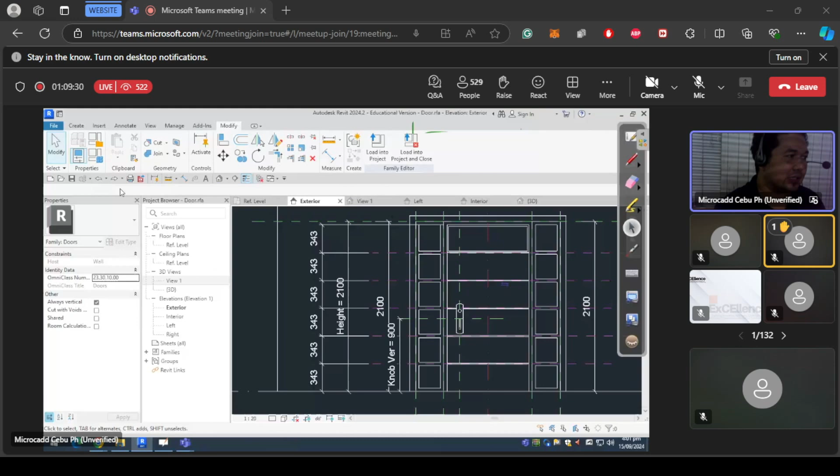Okay, so in Revit, if you are starting, you should use what's called a template so that you have a predefined setup. So for the model, I will just use new, and for this example, I will start to demo the architectural.

Let me look for the project template for this one. I'll use the default US Canada for the project template. So this is an architectural default US Canada standard.

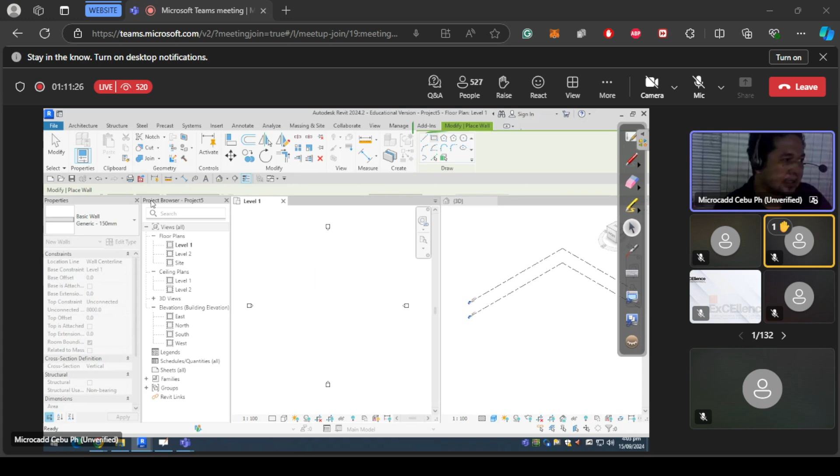So we'll check here what the height is. What if I want the height up to level 2? As default it's 4,000, but you can change the height, so I'll set it to level 2, and then after that, I'll draw it.

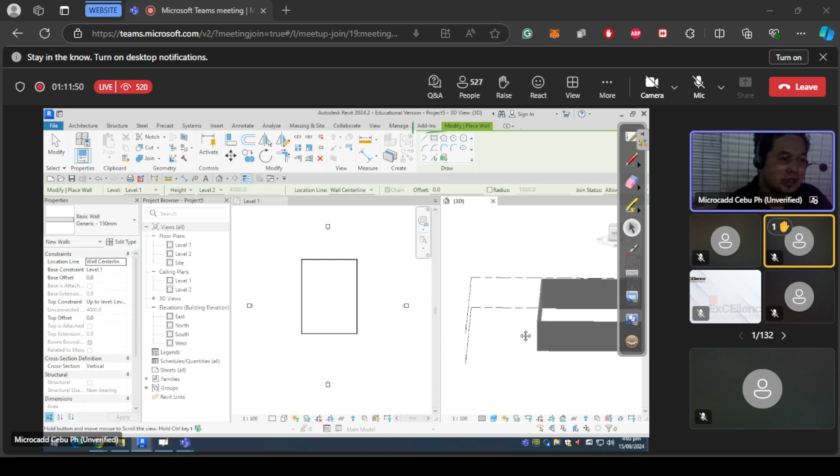So what have you noticed happened now? We have now a 3D model, and that 3D model is automatically at the top, at level 2.

And if you want to revise, for example, because in a project, revisions are the most common thing, so if there's a revision and you want to revise, you just update it. It's not like in CAD or AutoCAD, where you work in 2D first and then convert it into 3D.

And another feature of Revit is it has predefined libraries you can use. You can also create a customized library, or you can also use the Autodesk one. So for example, I'll use a predefined one here, which is doors.

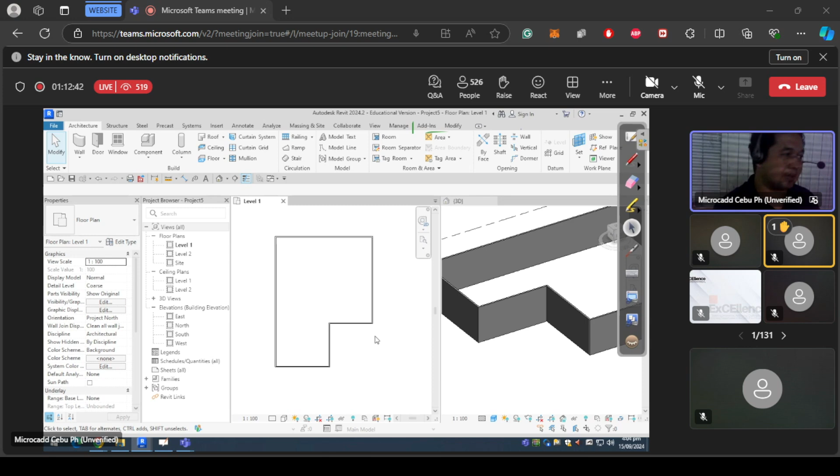So I'll place a door, then let me look for the door to use. For example, I will try to use the residential one. This one, it has types here, and here are the standard sizes, example 900 by 2.1, or 2,100.

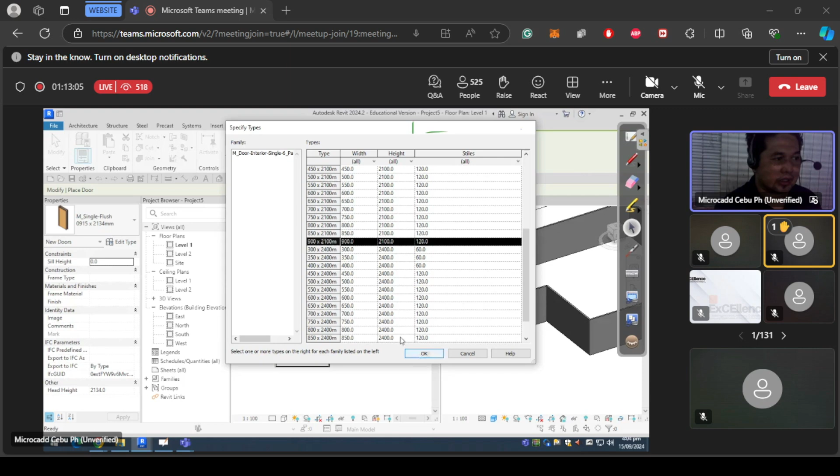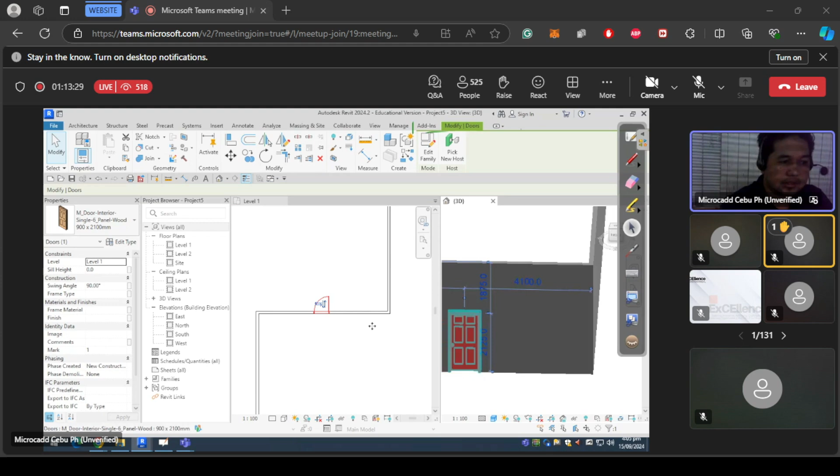So once you change it, it affects the 3D and plan, even in scheduling. If you have a schedule and you erase this, your count will be reduced. If it becomes 0, automatically the schedule for doors gets erased or deleted for whatever was removed.

Anyway, I will just drag this one. If possible, if you want a certain distance for that, let's say I will add 100. I'll snap it here at 100.

So now it's 100, and then I will just erase it. So you can control the distance. Okay, next I will use a window here.

Same thing, I will load a library, for Autodesk. So W for windows. It's called family here, I will try to open the family, and these are our families.

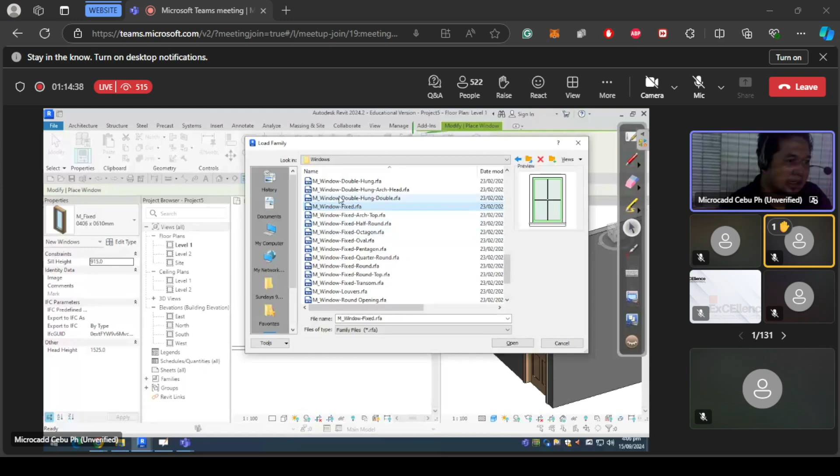Okay, so I will just use this one, then attach it here. And so there it is. Then what if I want to center this location of the window here on the wall?

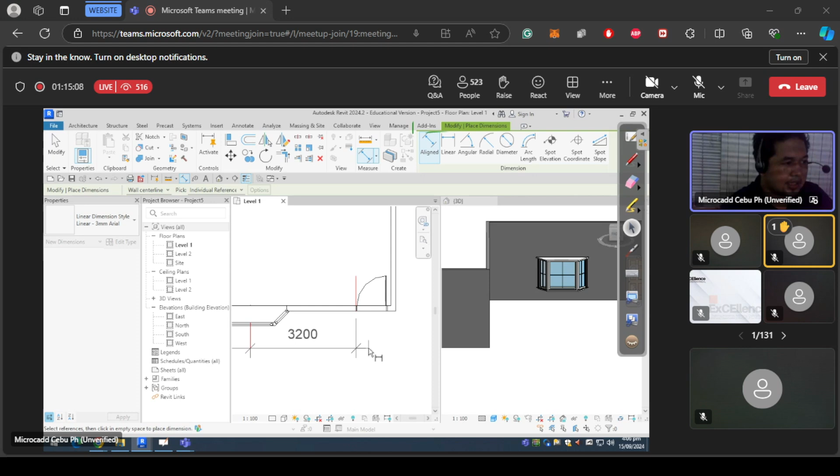I can just add, and remove it from our window, a door and equal, so automatically it now has a center at the midpoint. And then this is the biggest challenge, especially in manual drafting.

I don't know if there's still manual drafting nowadays.

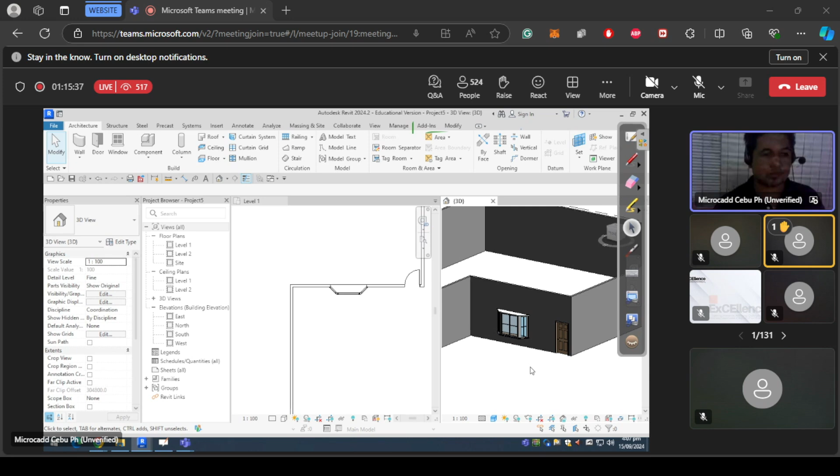But before that, we had that subject for manual drafting. So the biggest challenge even in AutoCAD is, kahit sa AutoCAD, how to create a roof. So for the roof, let's make it easy. Example, I will try to change the level.

Kasi masyadong mataas, okay? I'll say typical height 3,000 and automatically you will have a height of 3,000. So that's how easy the revision is.

And then what if I decided to create a roof? So there's already a tool here that can create roof. Let's check it here. Okay, roof, then I will have the overhang. Okay, then this one, 1,000, so I will just use 1,000.

So Revit has the capability to compute our slopes, the design of your roofing. So for example, for now, I will just use the 30 degrees slope and finish it.

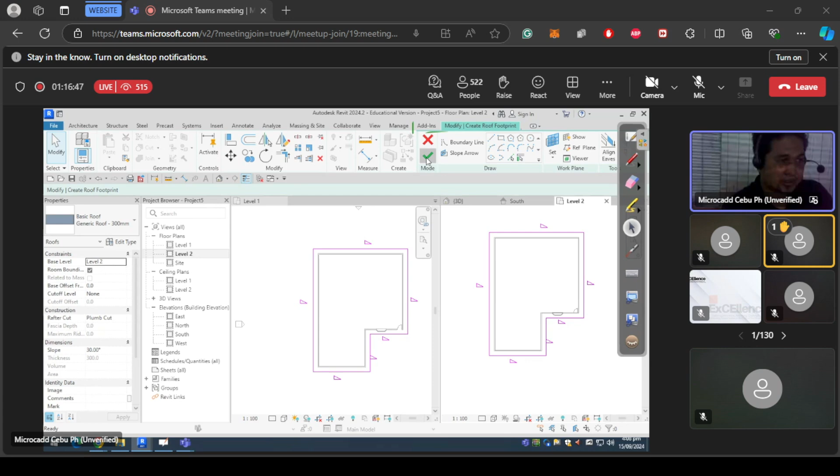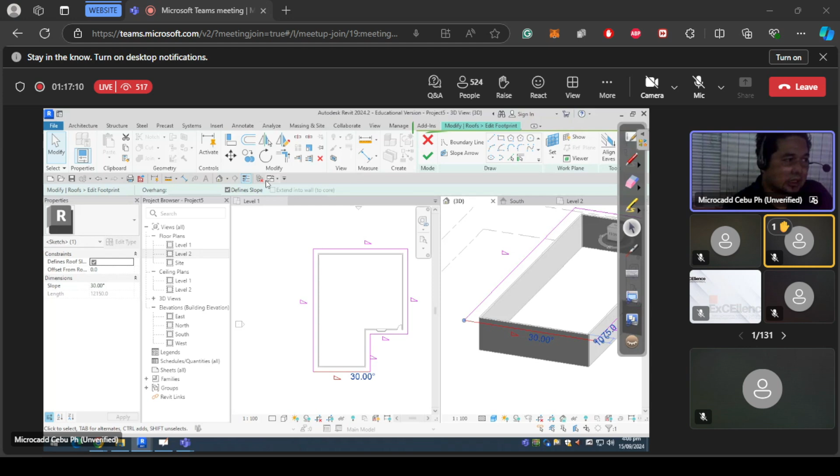So it's finished, and if I try to click into 3D view, we now have the roof for that. So this one is called hip roof. If you want to convert this into gable, you can just change the property. Then I'll just close it, attach it.

That's how easy it is. So you can also try this one. I know some of you already have an idea about creating plans, but in Revit, it's parametric.

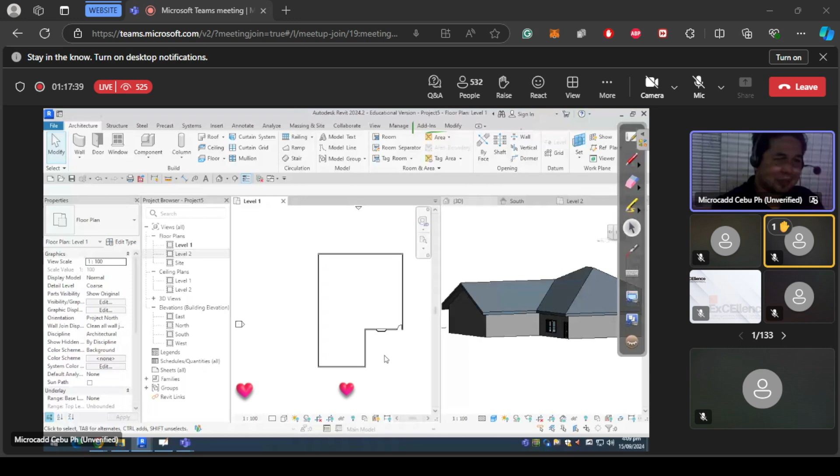So for another one, as our program for civil, what about the project cost? For example, I want to check the area of the wall. So actually I can get that by creating schedule quantities. It's possible here.

So I'll analyze it rather than checking it manually by means of height, then the area, then subtract the opening. Here, automatically you have that area.

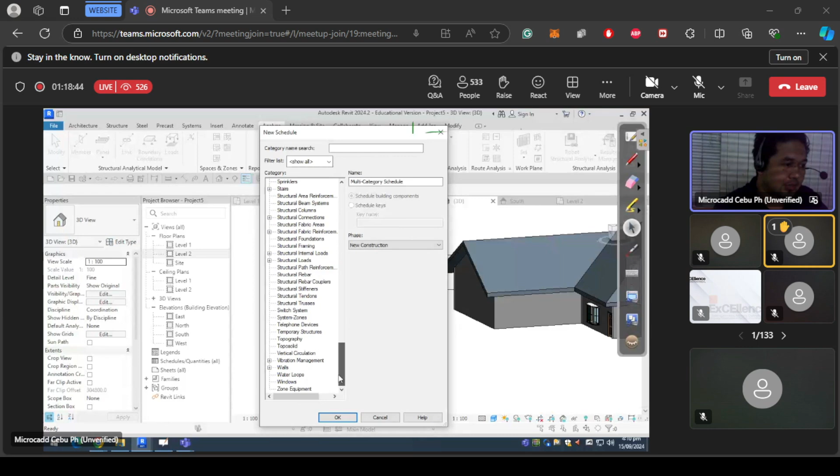Okay, so I will just use this one tool, schedule quantities, and identify. The main idea here is just to identify what is the category, and the category for the wall is just wall. They're the same. And I'll say, okay, identify this.

I already have the area, and the thickness I used. I can have the type name, type, and when I click okay, there, I get the area.

But I can also modify that, so let's sort it into one. Sort by type, since it's just one type. Then let's get the totals. Okay, there. Oops, what happened here? Sorting.

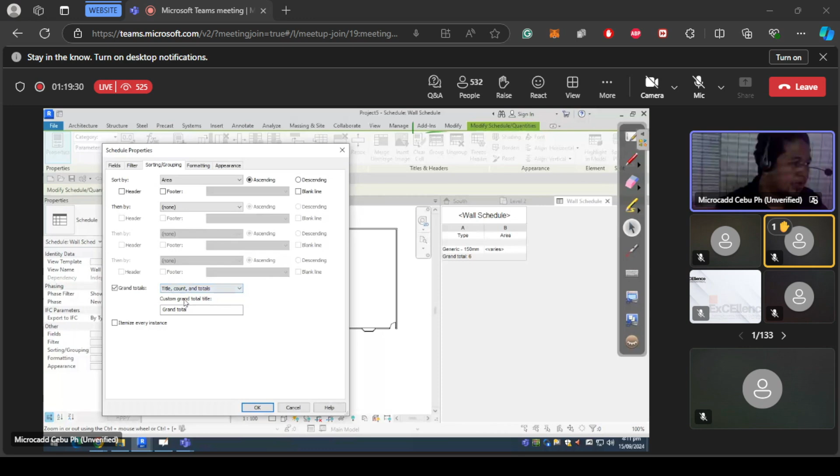Okay, so by area. It's not possible by area alone, but you can get the totals. It's possible to get the total. Then, formatting, then you can add totals so we can get it. There, so this is the area for that wall.

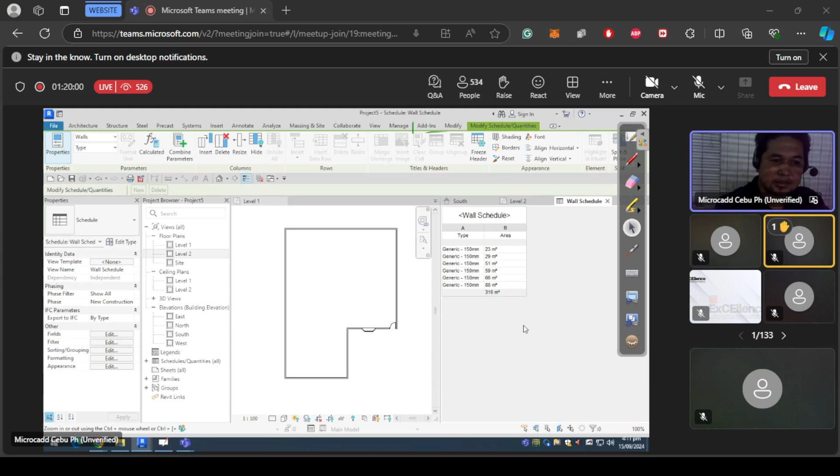The good thing here is, if there's a revision, like for example, I change this, okay, this one, the area will automatically be reduced. It's automatic, so we've defined the area of the wall.

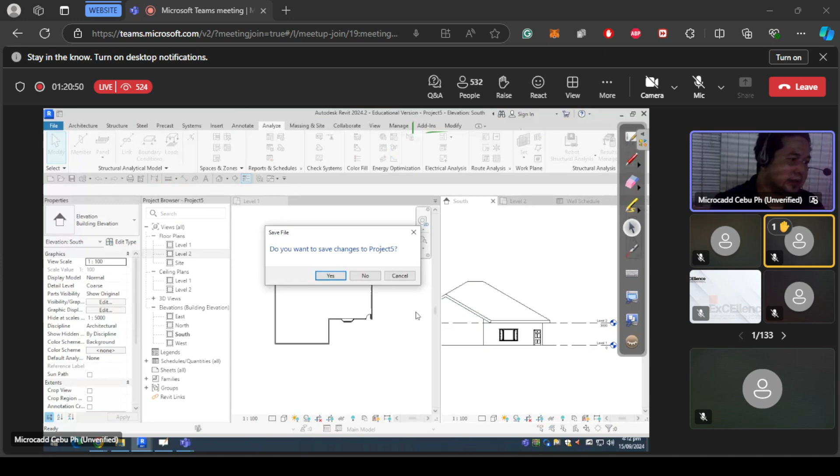Okay, so I will try to close this, then create a new one. Again, just a reminder, in structural, we cannot design structural without architectural first.

So that's necessary, it's a prerequisite of structural and MEP. So for now, I'll just assume, class. Okay, so I will just use this one, Structural Analysis Default Metric, and open it. Okay, so I'll make a grid here.

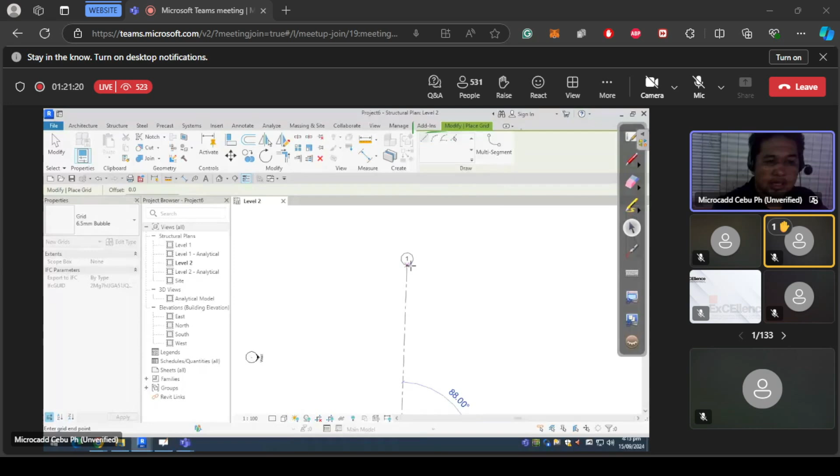So let me make a grid here. There it is. The good thing here, for example, you have the grid, you have this grid bubble, and it already has the column index indicated. So number 1, and if you notice, I will try to have 5,000.

Automatically, the next is number 2, then you have number 3. Okay, there, it's automatic.

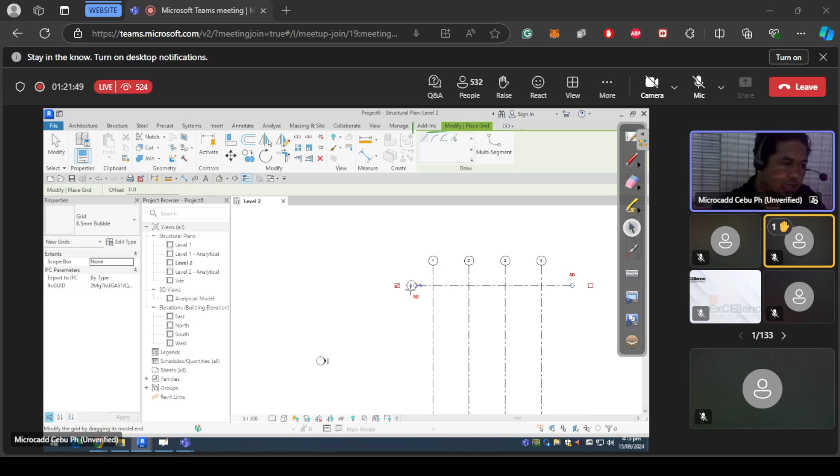I will just create a line first. And change it into A. So I'll say A, so once it's detected, it becomes A already.

So if I will continue the creation for the grid, for example 5,000 again, automatically it updates, you get this BC, it's already updated and continuous.

You can just adjust from there. So if you encounter, for example, multiple segments, that happens when the property line is too irregular. Okay, so you have this one, we have multiple segments for that.

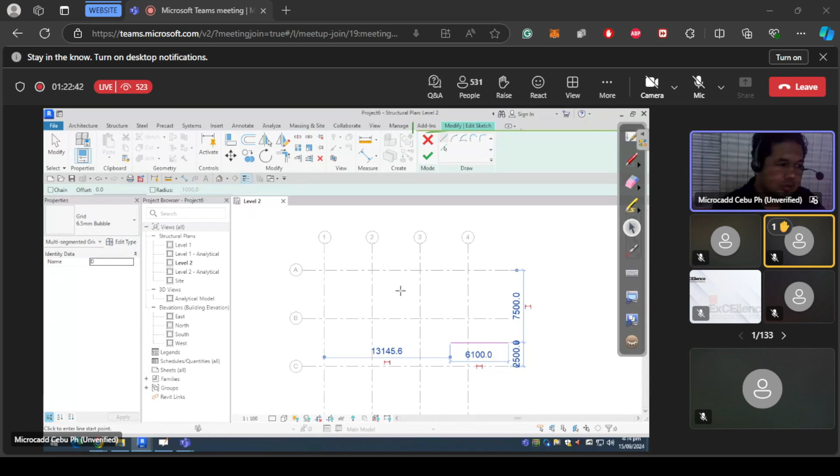So what I'll do is start here, this is just an example, then go over there. I'll just check the chain. Okay, so it's already there, for example then 2, prime for example.

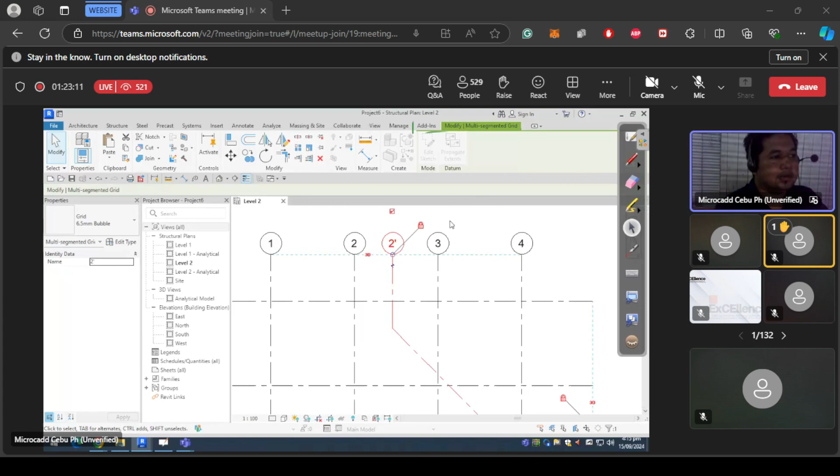The apostrophe doesn't seem to work. So it can go here, you can create multiple segments in Revit. And aside from that,

If I try to have the 3D view, let me show it so it looks better. There, shaded already.

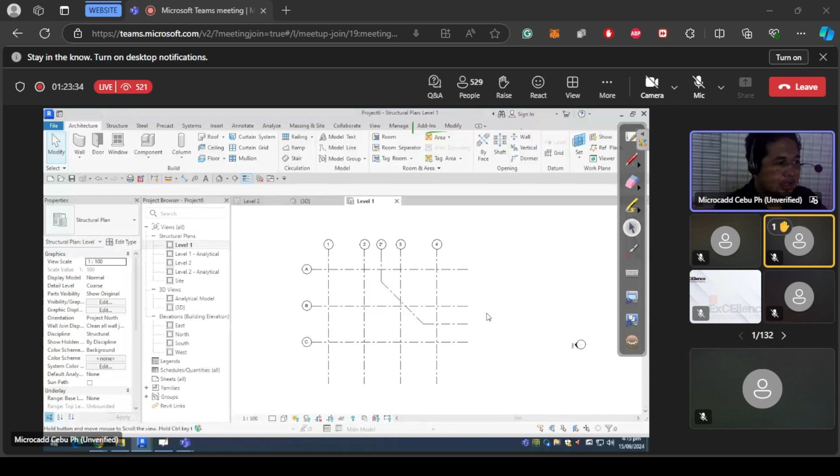Okay, so I will activate level 1, start at level 1 for example, and let me split the view.

So this one, this is a good example, the design is centered, let's say the column is centered. So you can define what your column is.

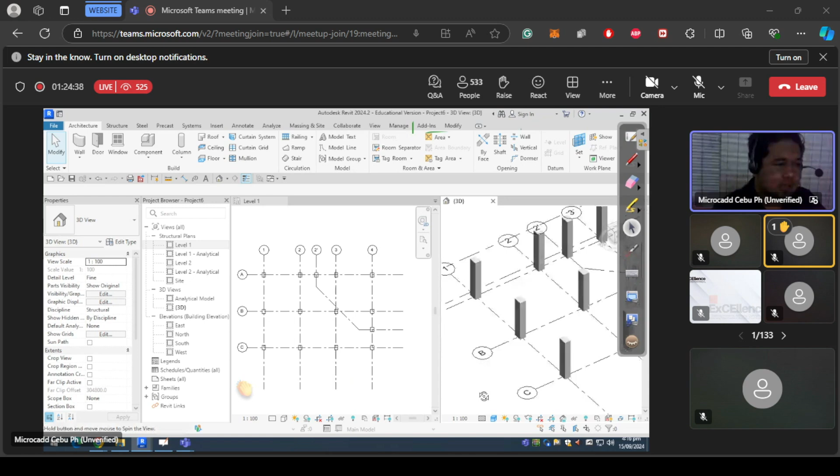And next, we can add, if I try to select all the columns, I'll extend it downward, going down. So let's say 1,200, negative.

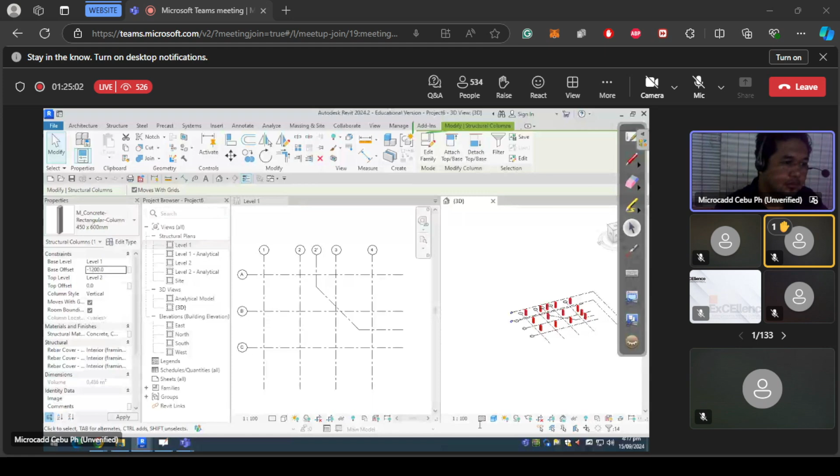Okay, so extended, you can also add what we call footings. So for example, I will just use this one or change the size.

Like 1.2 for example. Then that's fine, this is just an example. Okay, 1.2, 1.2.

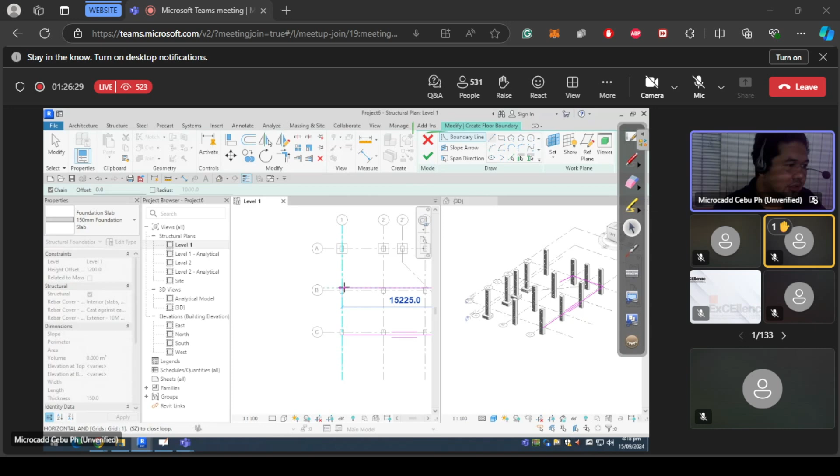It can also just be rectangle. So, negative. And okay, then you can just change the thickness if you want to update it.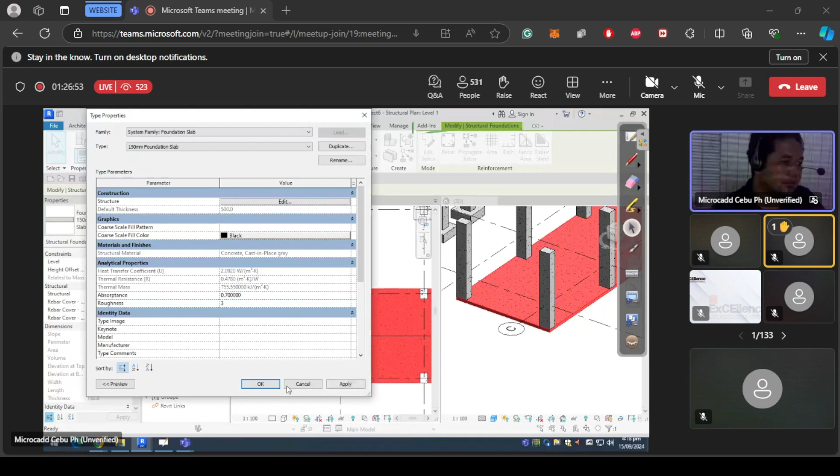And okay, so it really saves time. So aside from that, if you have the model now, you can also analyze and identify the problems.

that you may encounter once you implement the design. So one example, a common issue I encounter is the ramp. Usually if they are using CAD only, you can't see the ramp.

Sometimes that's the problem, the clearance of our ramp. At least you should have at least 2.1. Then another one, like I had this last project.

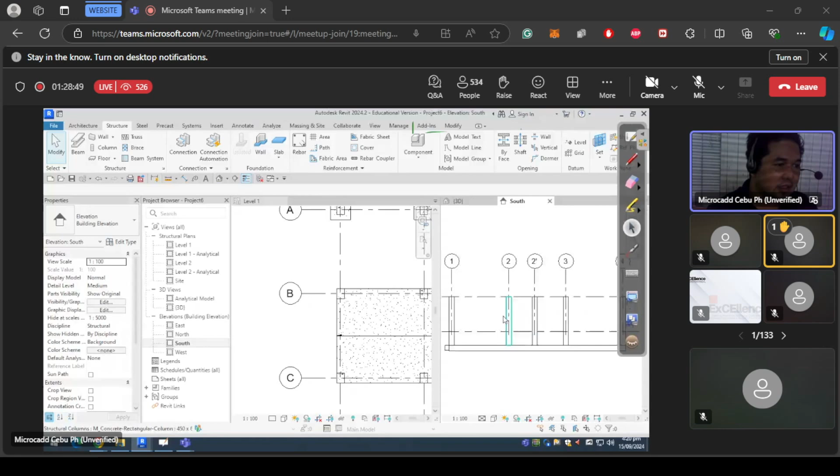So that's why if you have a program, you can anticipate it. Okay, next is you can also actually convert, for example this column, I can change it into

Okay, it's easy, you can cut it, or you can also create one.

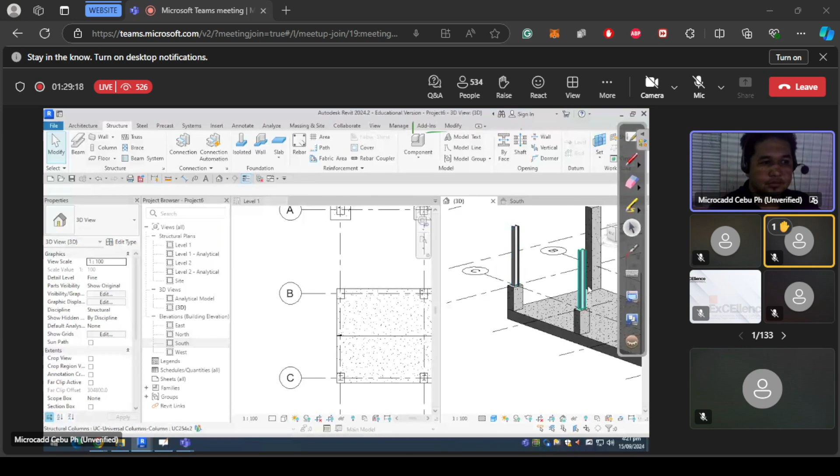Okay, for example, I will try to add a beam here. Let's add a beam. I'll just use the I-beam. As you notice, there's an I-beam here. I will try to split this as much as possible. It would be better if it's in the middle, right?

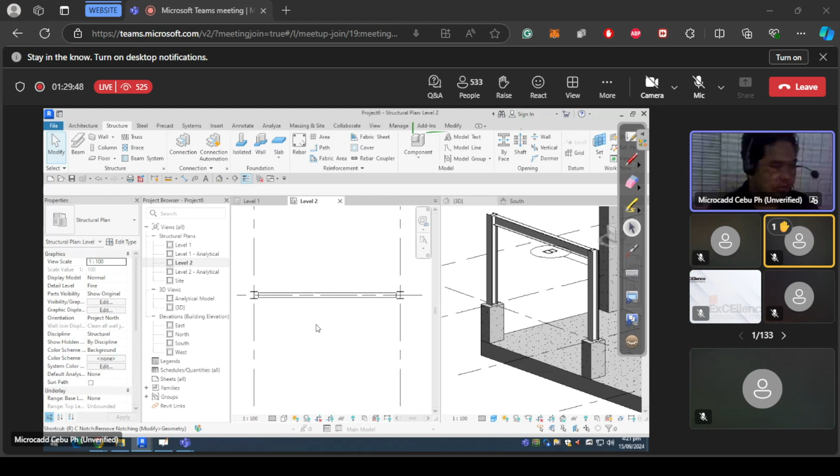Okay, let me just change this, I'll add a rafter. I will add height, let's say 1.5. And this one, 1.5 as well, on the other side. So I can just type 1.5 here too.

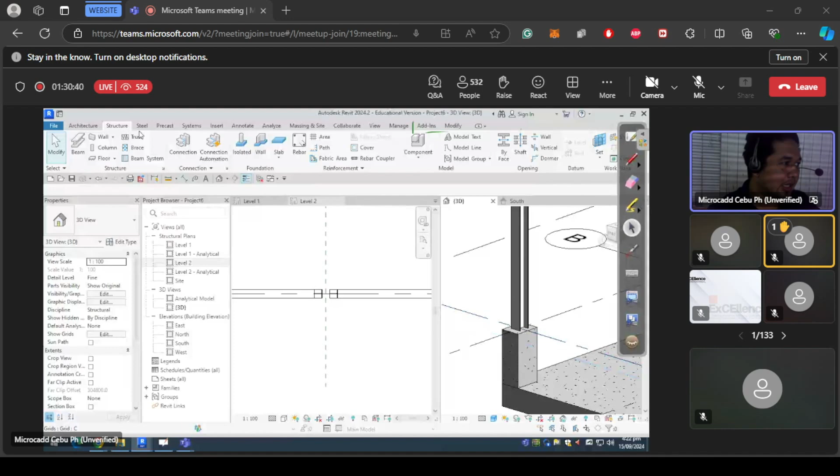Okay, so what if you decide to have a connection? You create a connection or plate here. It can automatically create the plate. Revit has a library for that too. So you have two options: either use the prototype model according to AISC standard, which it has, or you can create your own connection.

For example, I'll go with the AISC standard for this connection. I will just add the prototype that I need. For example, here, I will have the haunch. Okay, it's loading a bit.

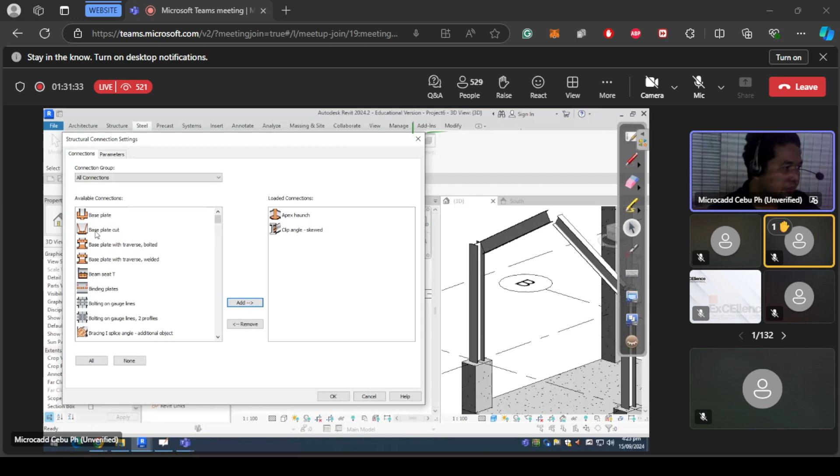I will just click the connection, find that prototype, click, and press spacebar. Then Revit will create the connection for that. You can change the parameters if they don't match your specification, but for now, it already has a connection there.

Okay, so the creation is quick. You can also create the connection, for example, here.

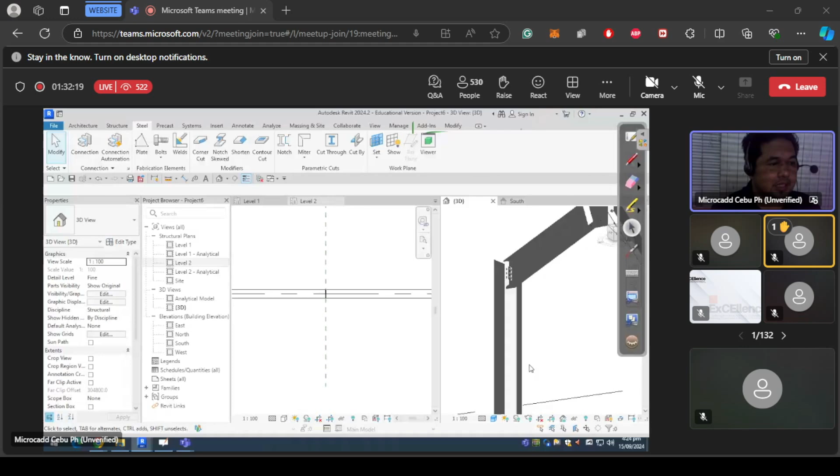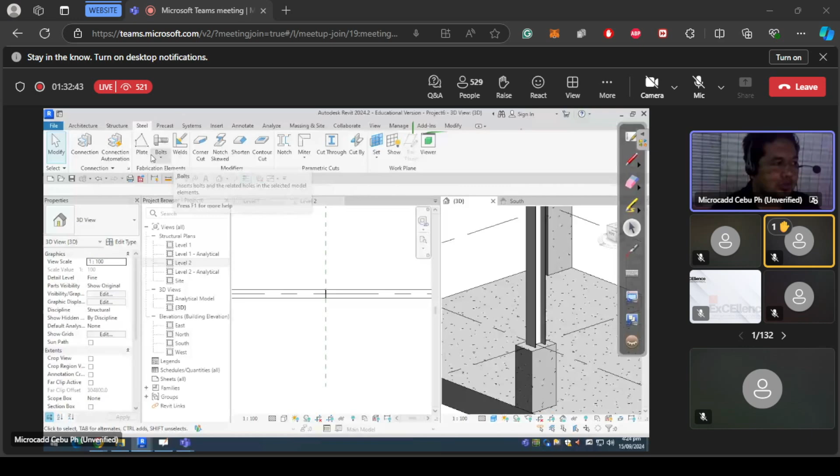Or you can also create it manually using this fabrication element. Again, if you create it, you can also schedule it - it gets counted. So like with a simple wall, it's at least easier. That's for the structural side.

Okay, so that's for structural. It's easy here. And if you have a structural component, you can also use this so it's just one model - you don't need to model repeatedly.

Because before, if we have the model, you'd repeat it in STAAD, and you'd also remodel it in, for example, ETABS if you use ETABS. But now, there are solutions for that. For example, Revit and STAAD - you can have this ISM. ISM is what they use. So ISM Revit, okay? It's automatic - you just map it and then you can have that model going to STAAD. Even the offset of sections is included.

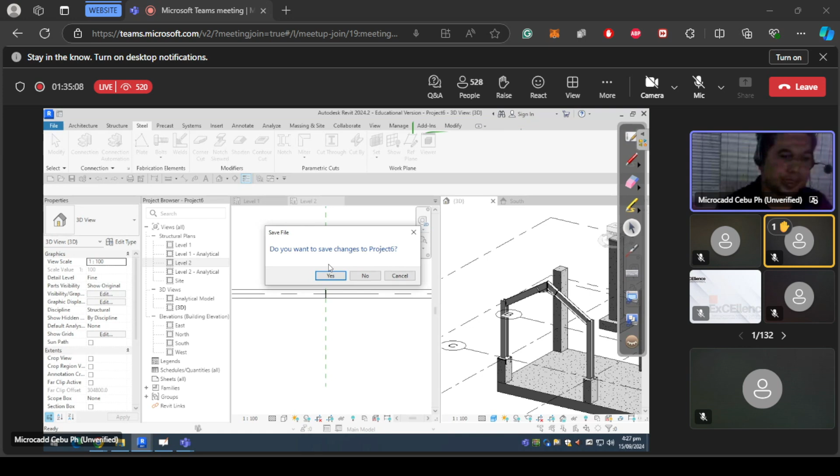Because we are allowed, like with me - I am also a master plumber. We are allowed to take the exam, right, for master plumber.

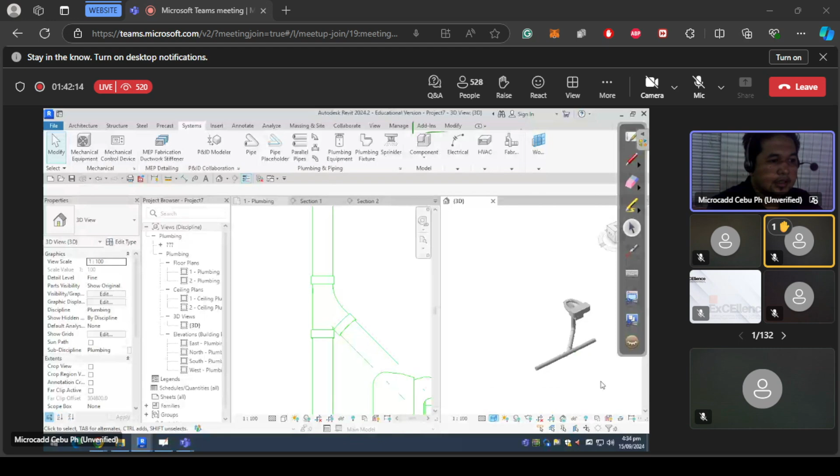Okay, so I think for now, ito lang muna yung madidemo ko as part of my profession as civil engineer, okay, master plumber. Okay? So any clarification? Okay na?

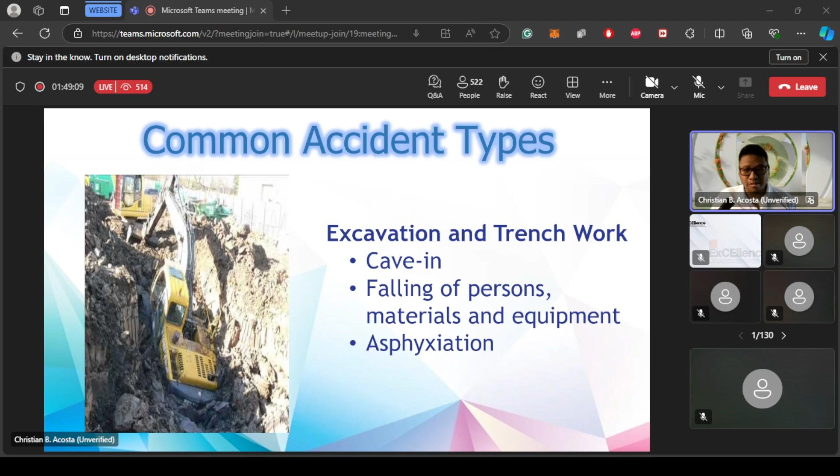Then ito, construction machineries and equipment, the proper usage, di ba? As basic as yung mga simple tools, martilyo, di ba? Sa martilyo pa lang, walang electrical, yun na yet napupukpok natin yung sarili nating daliri. How much more doon sa may mga talim, may mga tulis, sa mga grinder, yon.

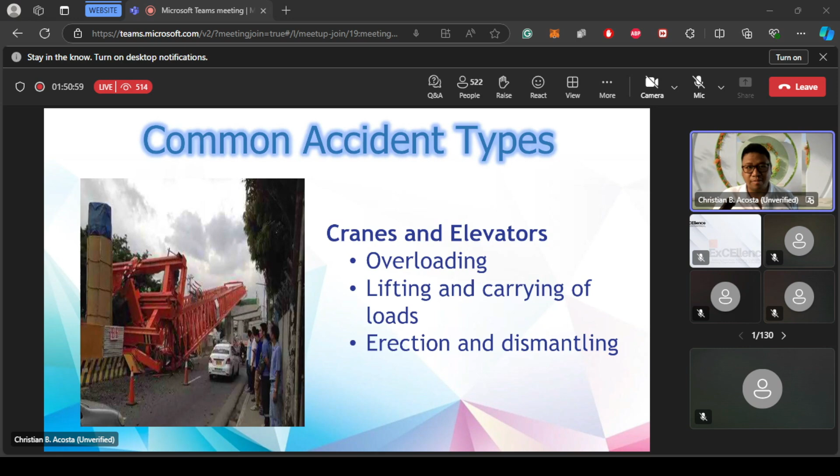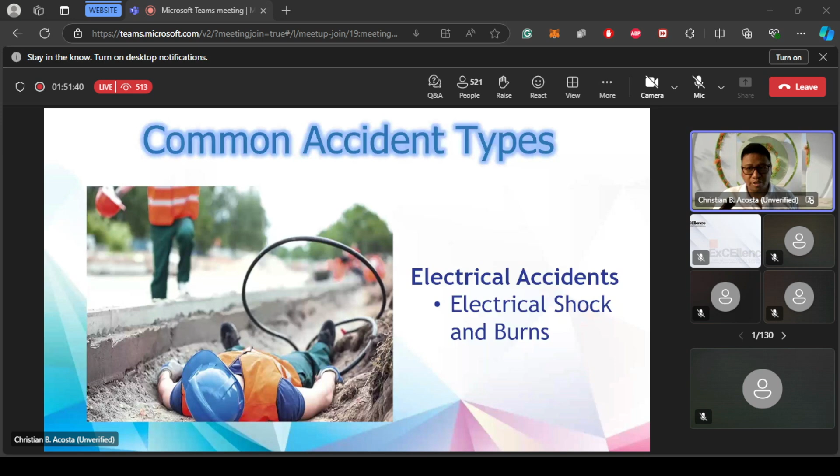And the common cause of fire, in truth in the Philippines, the number one cause is overload of electrical connections in each household. So hopefully for all of us, in your own homes, please check your electrical connections and make sure they're in order.

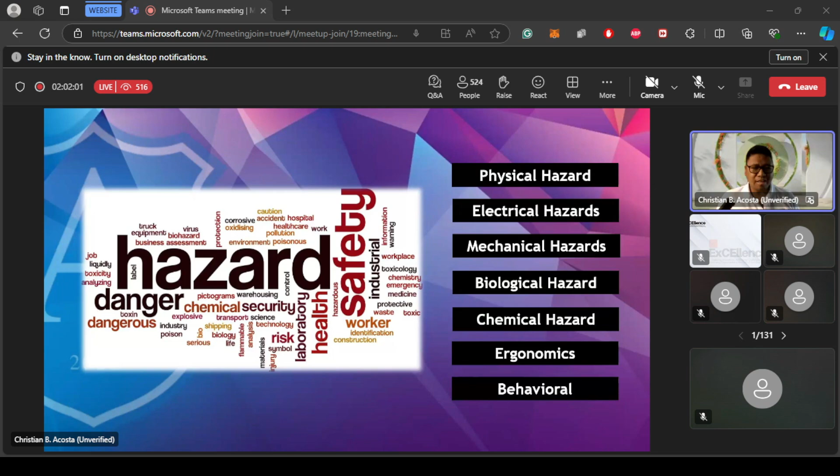Ergonomics and behavioral, kasama rin pala yan. So, let me give emphasis sa ergonomics, kasi ito yung something new sa atin, no? And very common sa workplace.

Kahit ako, medyo, di ba, sa posture natin, kamusta ka? Like, ikaw na nakikinig sa atin ngayon, kamusta position mo? Nakahiga ka ba? Nakaupo? Nakatayo? Kamusta ba? Have you stretched? Yan. So, that is ergonomic hazard, no?

So, ergonomics kasi, it is the science, no, na dapat yung work tsaka yung tao is nag-a-adjust sa isa't isa. So, therefore, dapat sumusunod po yung workplace, yung tamang height ng mga silya, yung tamang height ng desk mo, yung tamang location, no? Ang goal is to maximize yung work output.

Kaya nga po, nagkaroon tayo ng mga fast foods. Anong sekreto nila? They have a very good and very efficient kitchen. Doon pa lang sa arrangement ng mga kitchens nila, nagkaroon tayo ng maximum output of production. Ganun din sa ergonomics. Yun yung goal.

Itong hazards naman is nagiging causes ng mga health conditions natin. Manual handling, masyadong mabigat. Yan, hindi ka sanay magbuhat, no? Pero bigla kang pinabuhat ng isang galon na tubig, 'di ba? Sakit braso mo. Repetitive motion, especially yung mga hindi naman dapat, like lingon ka ng lingon sa likod, ba't di mo na lang itilt yung mesa mo?

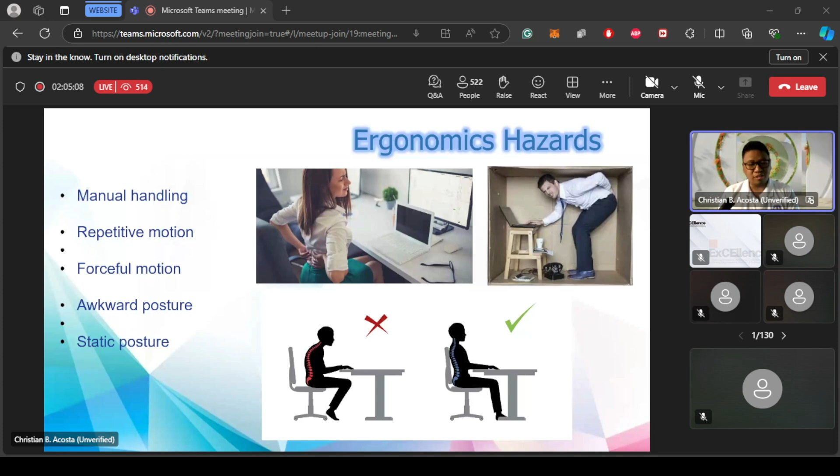Talagang, in short, kailangan tumayo. So, every 2 hours, actually kahit kung kaya 1 hour, kailangan nyo pong tumayo at maglakad-lakad kahit paano, no? So, that's why, very important yung mga break time. Yan, dapat every 2 hours, tatayo muna at maglakad-lakad. So, yan po yung sa ergonomics.

Ito naman, behavioral. What is about behavioral, no? It is a reaction by a person subjected to specific working conditions na nag-result sa accident. Mismong tao mismo, no? Example, leaving objects in pathways that causes obstruction and tripping.

I have an experience sa job site, talagang break time nila. Nag-install sila ng tiles. Gabi yun sa mall, no? Break time, install ng tiles. Talagang yung huling pokpok ng maso dun sa tiles, dun iniwan ng mga workers. Nagmamadali sila for a break. So that needs to be addressed, kasi syempre, malay nyo, gabi, madilim. Hindi masyadong ang ilaw pag sa gabi, di ba? Ang trabaho gabi. Tapos biglang may naglalakad doon, may kailangan maglakad, di napansin yung maso. So what could happen? Di ba?

So yan yung mga kaya ako nasabi kanina, kaya natanong ko, pakitingnan nga po yung katabi, kamusta po ba yung behavior natin dyan? Yan. It's because tayong tao mismo can really cause and can really become a hazard. So, yun yung sa behavioral hazard. Alright?

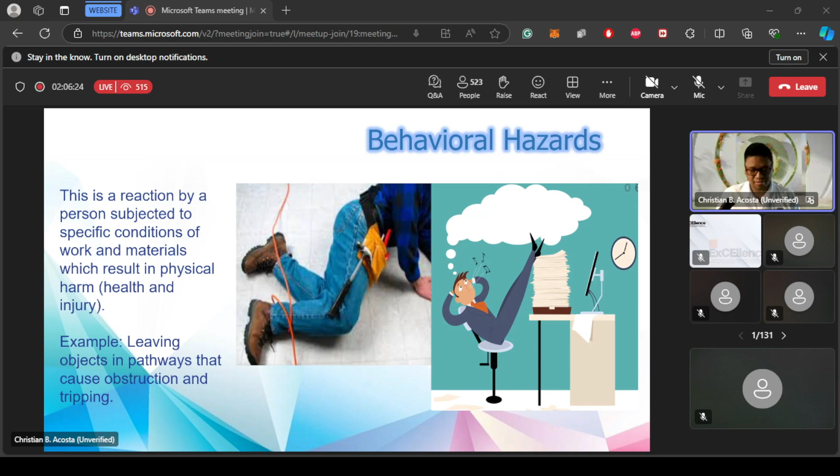Dito ba si Ira? Si Ira at si AJ, nakita ko lang sa participant, sila yung let's discuss the risk. Si Ira, si AJ, tsaka si Charles. Yan. Si Ira at si AJ, kunyari magjowa sila, no? Nasa seaside lang, nakaupo, naglalaro ng buhangin, versus si Charles na nasa dagat lumalangoy.

So question, si Ira at si AJ and si Charles. So ang tanong, sino yung mataas yung risk na makagat ng shark? Sino yung mataas ng risk na makagat ng shark? Si Ira, si AJ na nasa seaside lang o si Charles na nagsuswimming? Yan. Sino yung mataas yung risk? Pakitype nga po sa chat box. Hope it clears. Sana clear sa inyo yung question. Si Ira at si AJ, then si Charles, yung nagsuswimming.

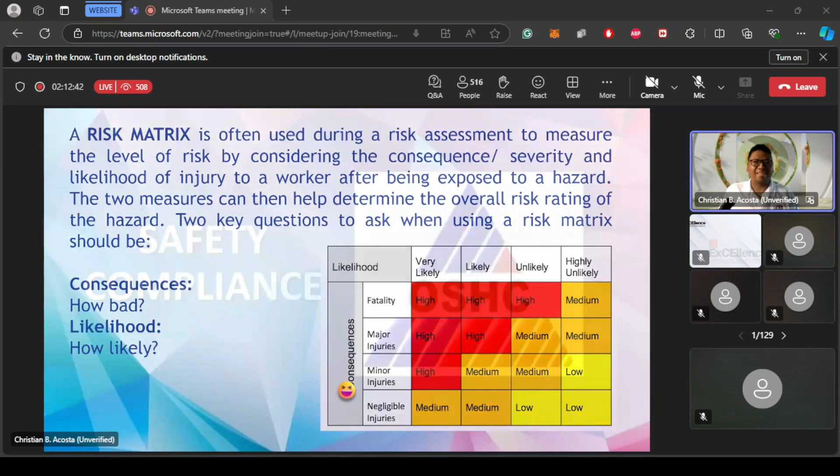Alright, so let's go with safety compliance. Before that, kailangan natin kilalanin yung batas - it's a recent law, Republic Act 11058. Nakalagay po dito: an act strengthening compliance with occupational safety and health standards and providing penalties for violations thereof. So we will discuss yung very important features ng batas. It is a law signed recently by President Duterte on 2018.